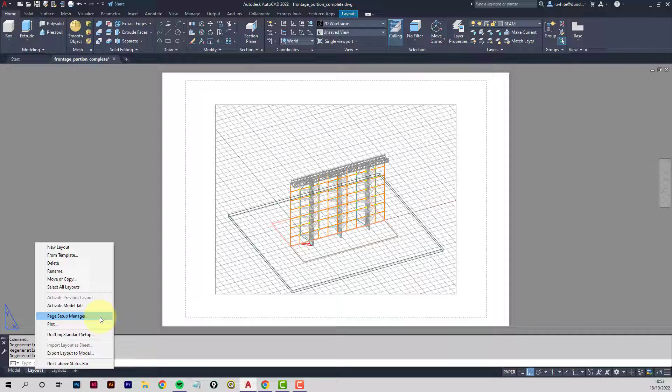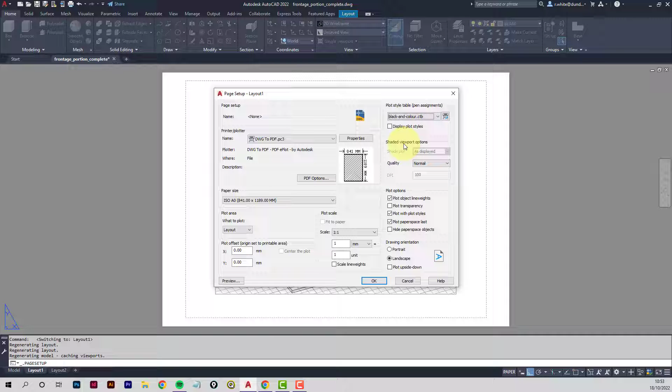So page setup manager, modify. Let's do DWG to PDF, and we'll go for an A0, so ISO A0, and we'll use our black and colour CTB, but we're going to tweak this in a moment. So we'll get it going with that and close, and let's maximise the viewport. I'll take ortho off.

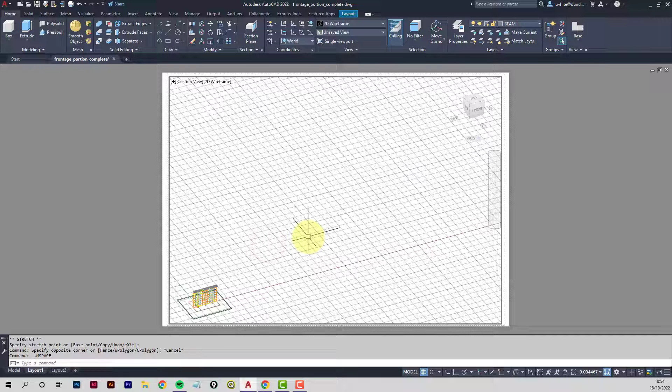Okay, so what we're going to do is set up a view. Double click inside and use the command VP, it's short for viewpoint. This way you can be a bit more specific, you're not just dragging the mouse around. You've got something you can come back to if there's a problem, so I find this a bit better.

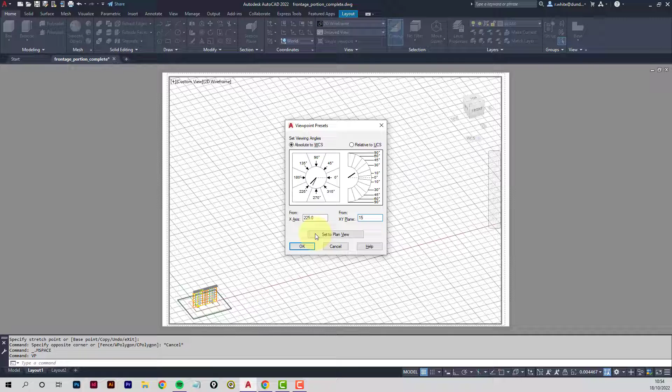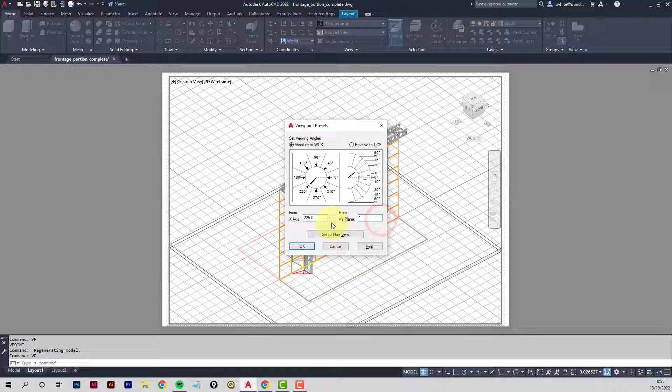So we'll go for 225 and 15. That gives us quite an even isometric appearance to the drawing, so the angles are the same in each direction, which works well. So don't rotate it now because you've wrecked that. You have to use VP and 15, we've got to keep it at that.

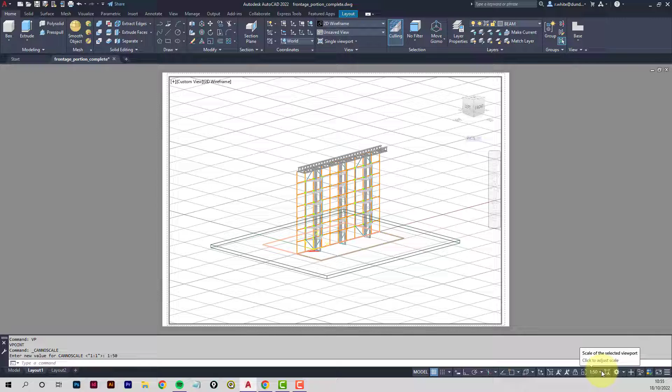Okay, and then we'll set a scale, and this is where it gets a bit guessworky. We'll try to see what scales we've got that are going to work. Maybe 1 to 50, that's going to be a bit too small. Maybe 1 to 30, possibly a bit too big. We're somewhere in between, we'll try this 1 to 40. I think that's probably going to be about right.

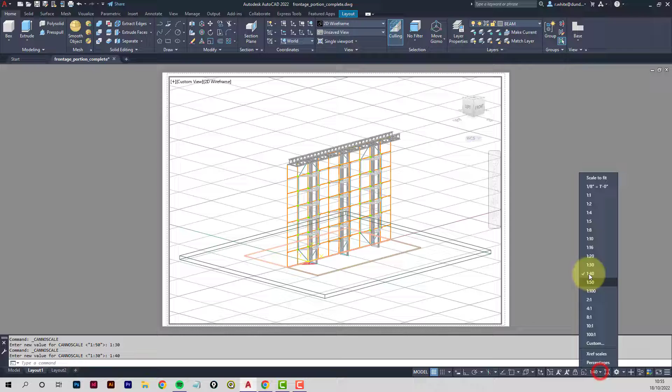Yeah, because we've got to pull this, extract the objects in this direction. Let's go 1 to 30, let's see, let's make it quite busy. So the bigger we get, the bigger we have this, the clearer things are going to be. I'm chickening out, I'll go 1 to 40. Okay, and then we'll tuck that into the top corner.

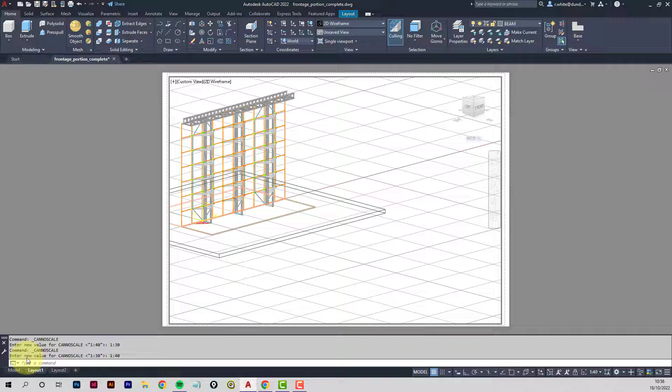Okay, so we've got room to pull the objects in this direction. Difficult to move the objects in paper space, so we'll jump back to model space to do the moving and look down on it from the top. So World UCS plan.

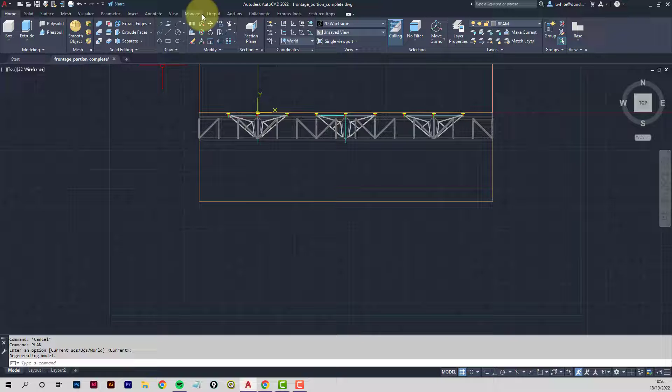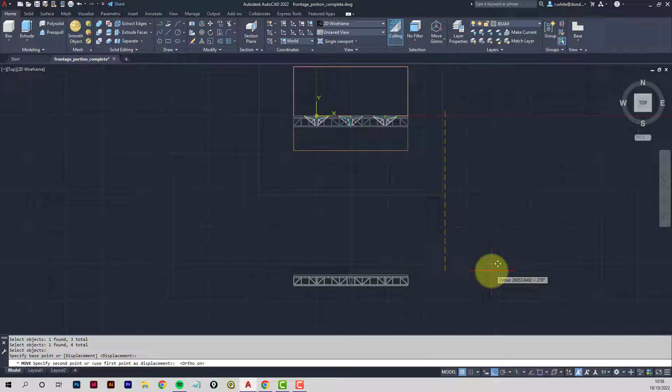Okay, and firstly we want to move the columns and the truss on the top. So I'll get the move, pick the truss, and hopefully picking up the columns here. And I'm going to use numbers, I'm going to put in distances so I know how much I've got to move things. So ortho on, and let's see what, say 30,000 looks like. So I'll move this down 30,000. Let's see if it fits in the view. Yeah, quite comfortably, that's not too bad.

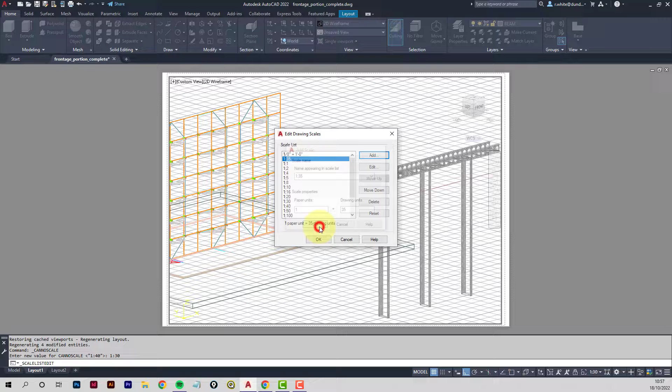So I think we could probably up the scale here. Let's go up to 1 to 30. Oh, it's just a bit nippy, isn't it? I'm going to do a custom one, 1 to 35. I want to add to this list 1 to 35. Drawing units, 1 paper unit equals 35 drawing units. Okay, and then apply that. Yeah, that's snug, I like that.

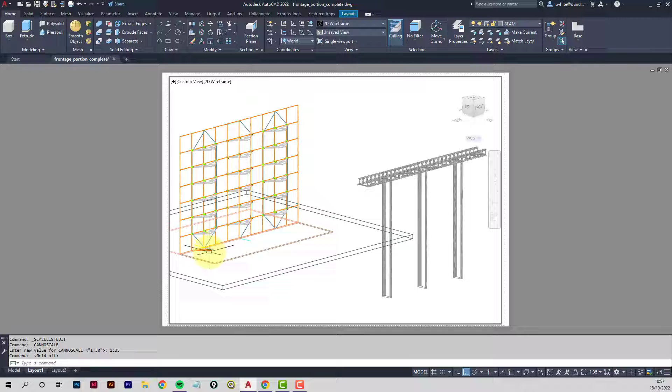Okay, we don't need to see the grid, that's causing a bit of mess. There's a few layers here that aren't really relevant either, so we've got some 2D stuff, and the bases as well, they're not going to really work in the diagram. So let's globally freeze these, so we've got floor, base, and ARM_2D, column 2D, and construction 2D. So we don't need those.

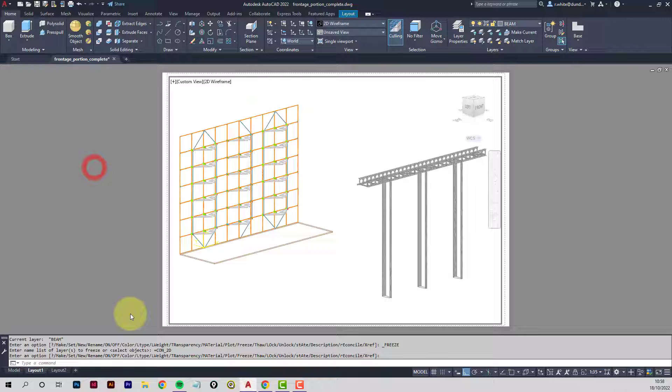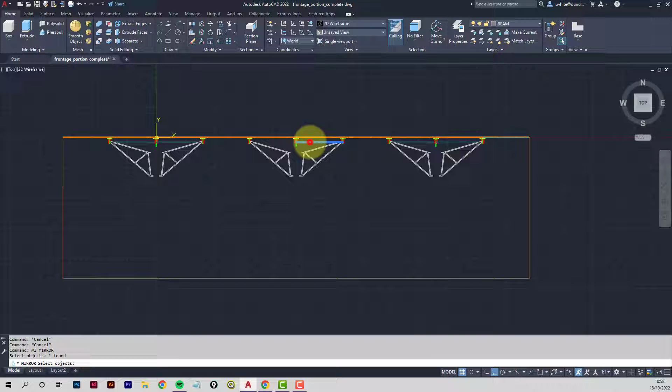Okay, now we'll move the trusses next, and the cables, we'll put those together. So I don't want too many rows of objects, or it gets a bit chaotic. We're missing a cable there by accident, actually. So if I mirror that around the insertion point of this object, there we go.

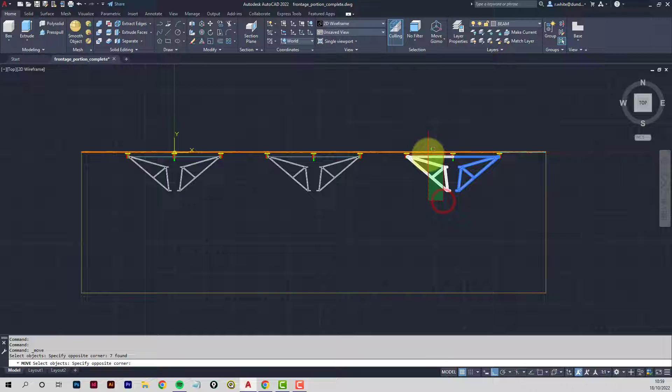Noticed that before. So we want to move these. I'm using a crossing window because there's a stack of trusses going down the way, so if I do just a single pick, I'm only picking one of them, not 7.

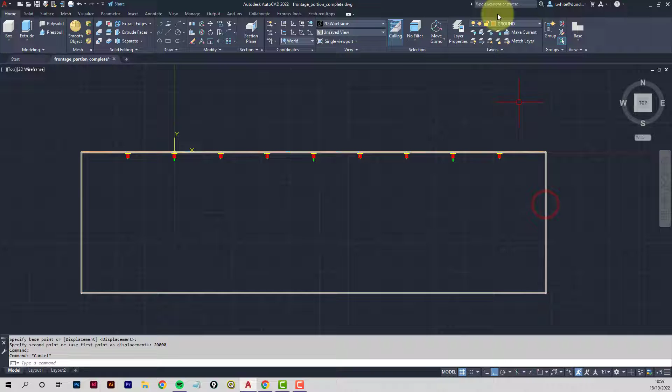So crossing windows, and then a base point anywhere, and we want to be, say, 20,000 this way. Okay, there's another layer there that could do with being switched off. Ground, let's freeze that one as well. Ground.

Okay, have a look at that in the layout. That's not too bad at all. We're not obscuring the trusses, but we know there's a bit of depth there. Having a little bit of stuff hidden is good. It kind of establishes the depth.

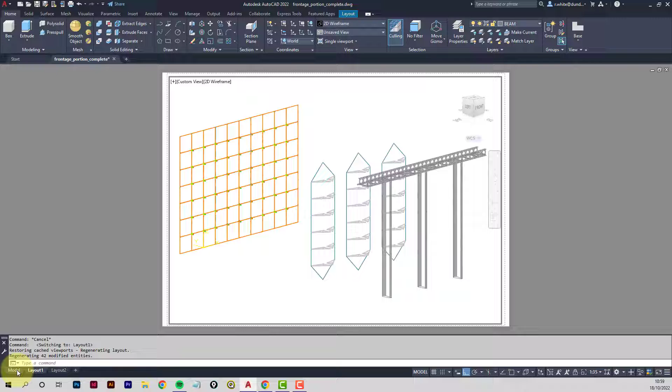Okay, now we've got the connectors to move. Having set this up before, I kind of know that if I move these 7,000, they should sit quite nicely. So I'm going to move them 7,000. When I mean sit nicely, they're not getting obscured. They're sitting in the middle of the window panes there.

They're not lying on top of the lines, which would make them difficult to see. If I demonstrate that, you don't want them to be sitting somewhere like that, so they're all sitting on the lines.

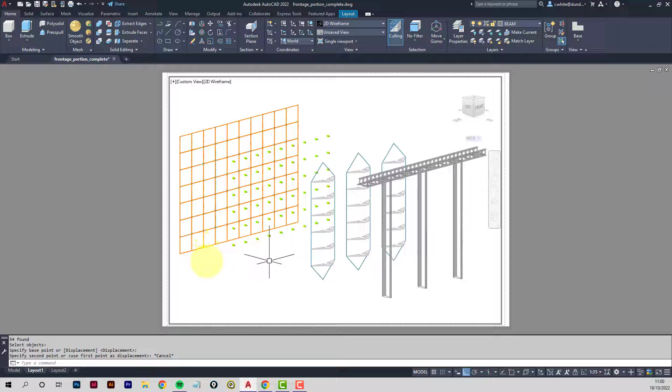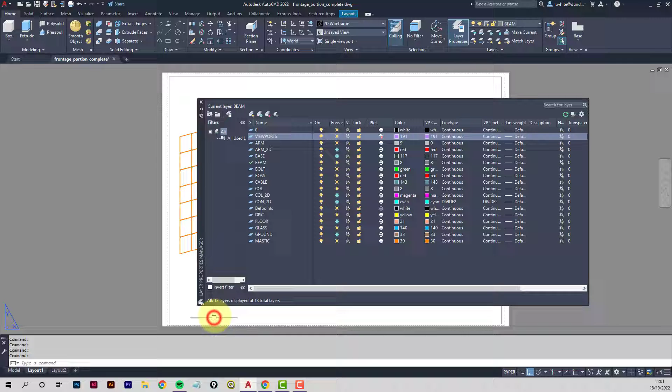Okay, so that's the kind of setup for the view. We've got to do a bit of layer control now. So I'm going to double click outside. Let's put the viewport onto its own layer so we can make sure we switch it off. So create a new viewports layer. Make it non-printing and give it a funky color so we can recognize it. And pop that onto the viewports layer.

Right, now ortho off and the O snaps are off. What I'm going to do is set this viewport to be the connectors and everything in front of that. So I'm hiding some of the glass, because I want the glass viewport to behave a bit differently to the front one.

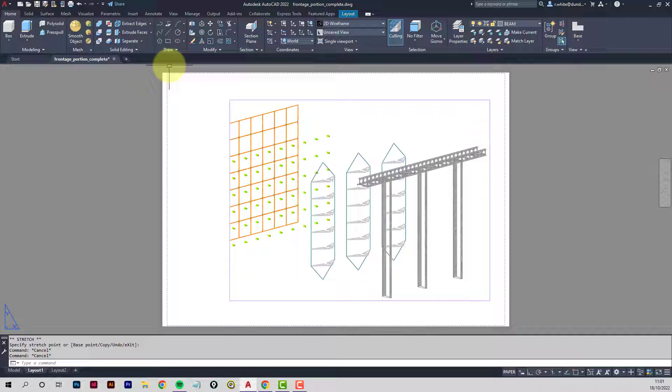Then we copy the viewport onto itself. Copy, enter. Need the O snaps now, so it's got to be in exactly the same place. So from here, pretend to go away, come back to here and pick, enter to stop. And then what I'm going to do is just fold this, resize this. So I'm only editing one of them just now, so I'll just make it a little bit smaller. Okay, and it's only got the glass in it.

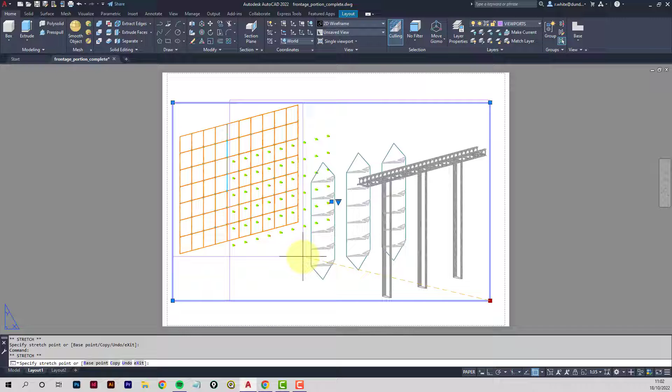Now what we do is a bit of viewport layer control. So I'll start with this one. What I'm going to do is freeze all the layers only in that viewport. So it's VP layer is the command, enter, freeze, star, so that's Shift 8 or it's above number 9 on the keypad. And then you have to choose the viewport. It says what do you want, which viewport you want to freeze them in. So we select, pick this one.

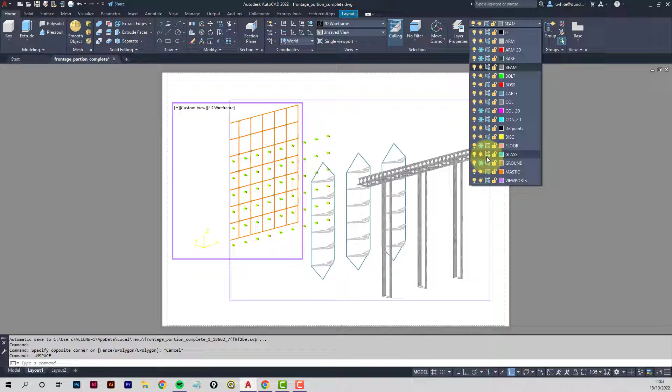Enter twice. Okay, it looks a bit strange, but then activate that viewport, drop the layers list down, and you notice they're all frozen in this column. But we'll just thaw the glass only. We'll not bring back the mastic because that obscures quite a bit of detail. So we've just got the glass coming back in that one. Now go to this viewport, and in this one only we freeze the glass and the mastic. Everything else stays there.

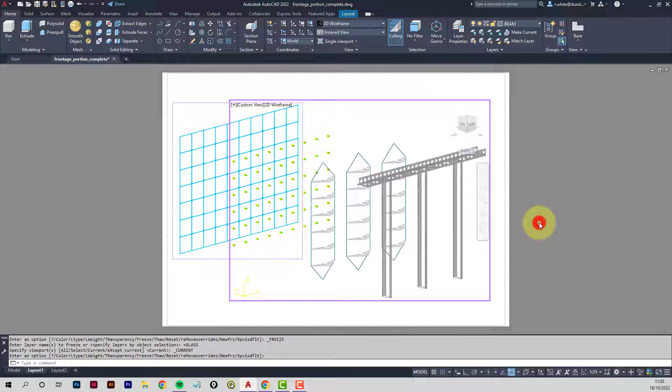If I just temporarily move this away, you'll see there's no glass there. The glass is only visible in this one. It's a wee bit tricky, takes a bit getting your head around how to, what the order and things to do it, but it's pretty good. Okay, let's do a plot preview and just have a look at what things look like just now.

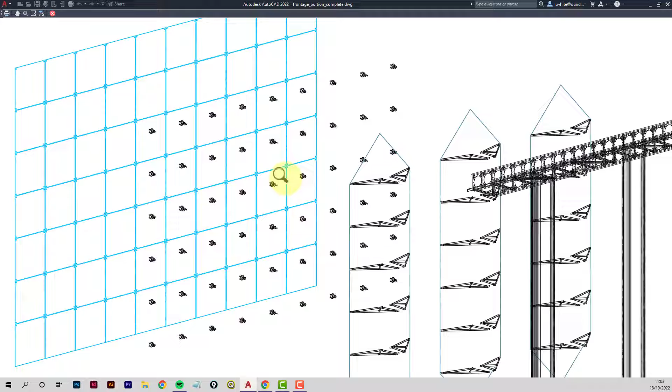Okay, so it looks, you know, technical, but it's a bit messy. We've got blue lines here for the glass. We've got a mixture of stuff that's heavy. There's no hidden lines. It's all a bit too chunky.

So let's deal with the hidden lines first. To do that, you'd use a command called MVIEW. MV, enter, shade plot, hidden. And then when it says select objects, it means select viewports. So we're just doing the hiding on this viewport only. We'll leave the glass as it is.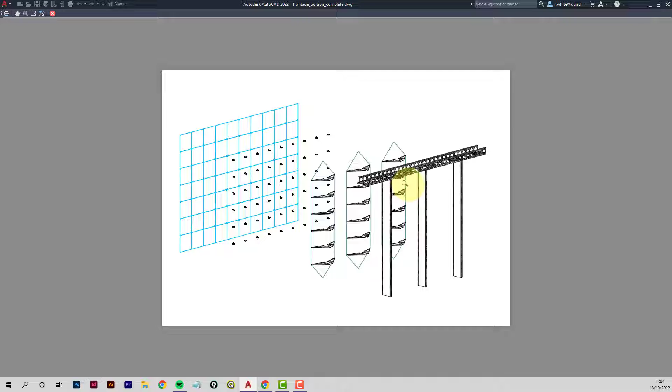Okay, so that's that done. Let's test it. Do a plot preview. So now you see where the column is hiding the trusses there. These are looking a bit more defined, but we've still got problems with colours and line weights. That should be hiding there. It's a bit. Oh no, that's right. That does go over the corner. That's right. That's doing it right.

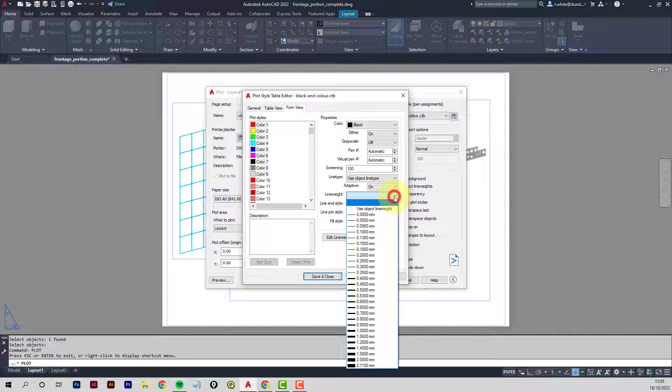Okay, exit the preview. What we can do is edit the CTB to deal with the color issue. So edit the CTB. So select all first 9, and they're all going to be printing black anyway, which is fine. But we want them to be 0.05 millimeters, so it's the thinnest pen it can use. So then save as, and I'm just going to add thin to the end of that.

Save and close. We need to remember to change it here to the thin one, and then apply that to the layout. Oops, sorry, that's to continue the plot. That's fine. So we've applied it to layout.

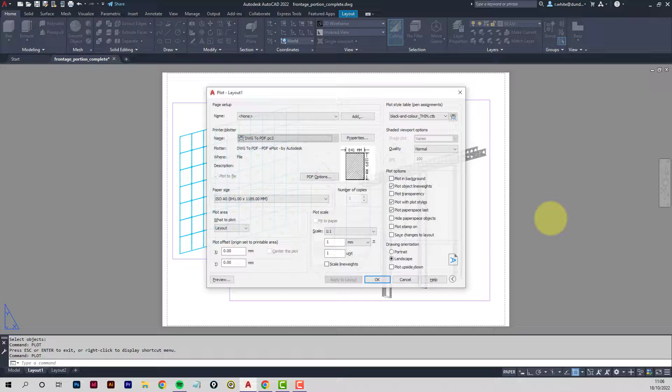We can close the dialog box. Let's just test that, let's do a preview. Okay, so the line weights are looking better and looking finer.

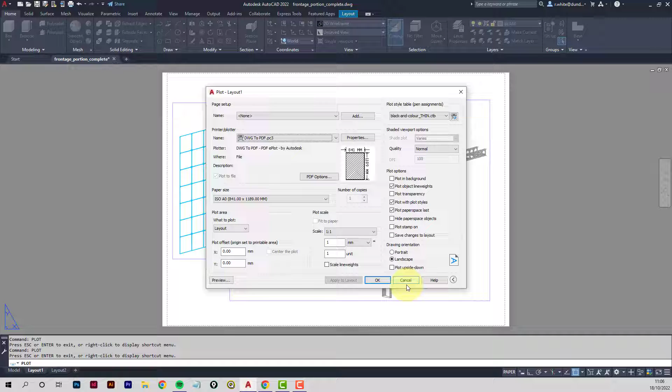Okay, we've still got a couple of colours here that are rogue. You deal with that with the layers dialog. So if we go into the layers dialog, we're looking for the ones that are colours above colour number 9. We're not printing that one anyway, so we don't need to change that, but we are printing the cable, so we'll change that.

Let's just make that cyan, and let's make the glass blue. And that should deal with that. So everything should print out black now and thin lines.

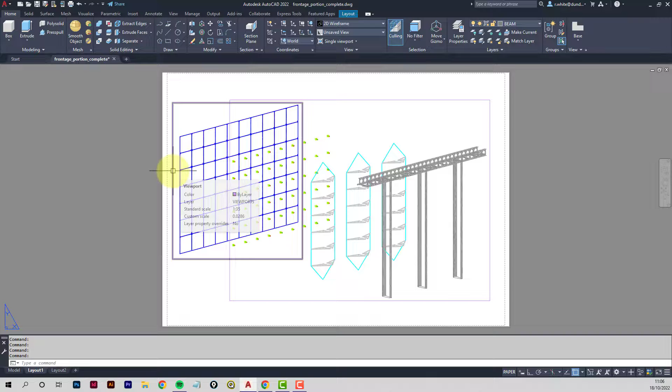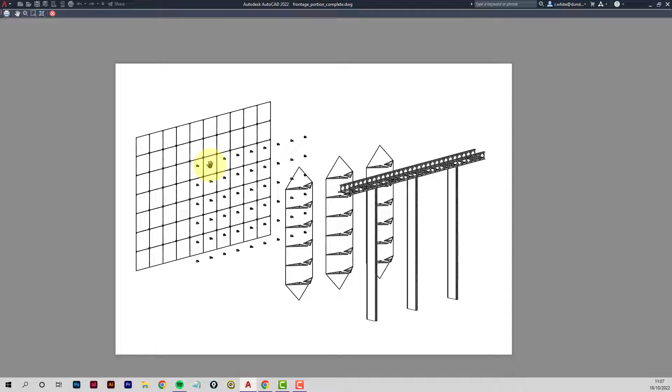Let's do a plot preview. And that's the way I wanted it to look. So it kind of looks glassy now. So everything's an even line weight now, which is what you would expect in this kind of diagram. Nothing's chopped through, so there shouldn't be any heavier lines here than anywhere else.

Okay, and after that it's an annotation job. So this is done in paper space. So let's create a new layer for annotations.

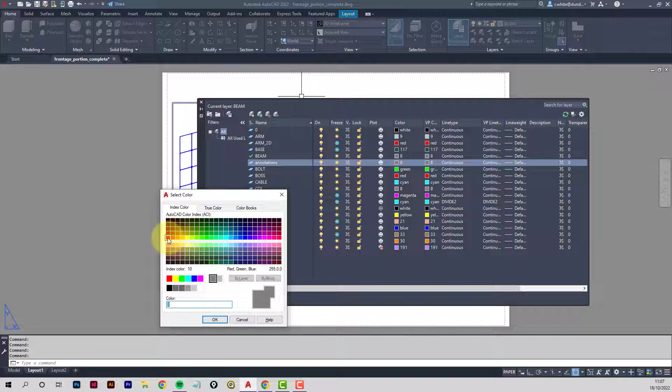I'll make this, let's just go with a bright red at the moment, so color number 10. So these will print in red. Okay, let's make that current. Actually, let's be tidy and make this in capitals as well. Let's just call it annotate.

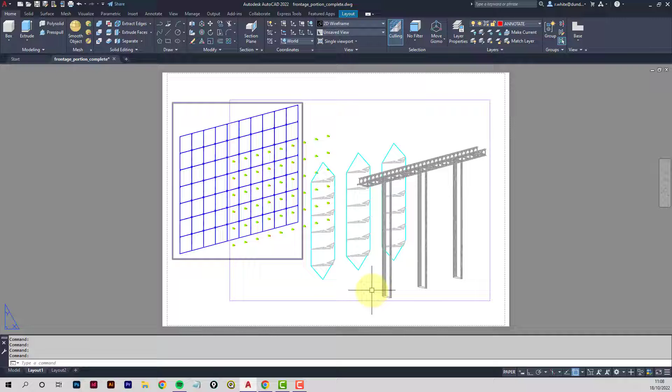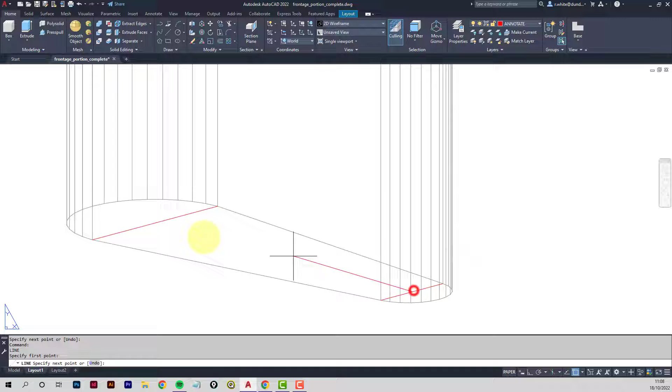Okay, annotate's current layer. So we need to set up the line to show the kind of breakdown. So what I'd do here is actually trace, while I'm in paper space, trace over the drawing. So if I draw a line from here to here, one from there to there, pick up the end, and then from midpoint to midpoint, midpoint to midpoint. Okay, I can set my coordinate system to be that line if I want to.

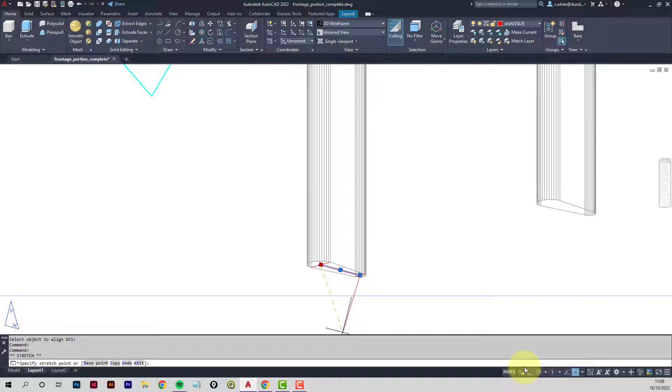So you can do UCS, enter, and then pick an object. So anytime I draw a line, it's going to be in that direction. So if I want to stretch that with ortho on, I can just use the grips. So you see how you're kind of implying these are connected. So we don't actually draw onto anything, just kind of leave it sitting like that.

But let's put this line onto the connectors. So we'll draw a line that goes from glass to connector to truss. Okay, so let's move this from end point there to the insertion point of one of the connectors. So it's handy keeping them as blocks.

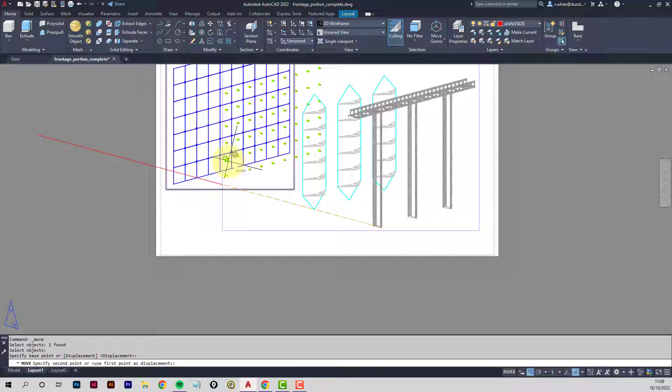So we'll go to the insertion point of, let's just overrule the others for a second, so it only finds insertion points. So let's go to this one. Okay, and then I'm going to extend that till it goes to the end of the truss.

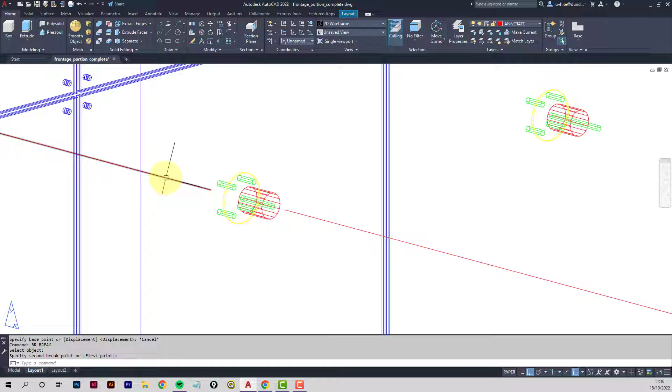Okay, now we can break that, make it look a bit more diagrammatic. We can just break the line, so it implies that it's kind of going through the object. And similarly here, if we break it just about here, it shows the connection there. So BR, pick, and then delete that. So you get the idea, it's kind of coming through.

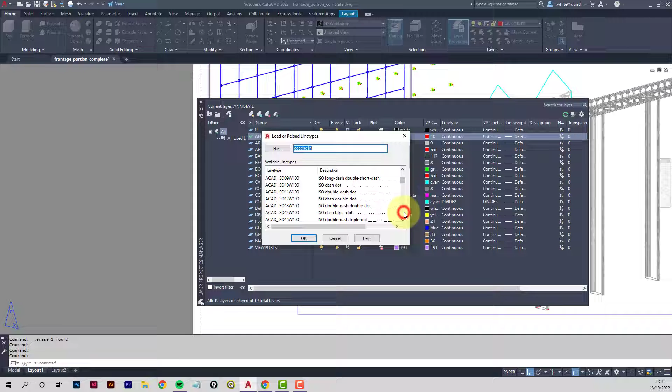It'd be good if these were dashed lines, so let's make the layer a dashed line type. Divide, no, I think we need another one in there. Let's go for dashed, so what's that one? Divide 2, let's use dashed 2. Okay, we need to use that, so let's click it and OK.

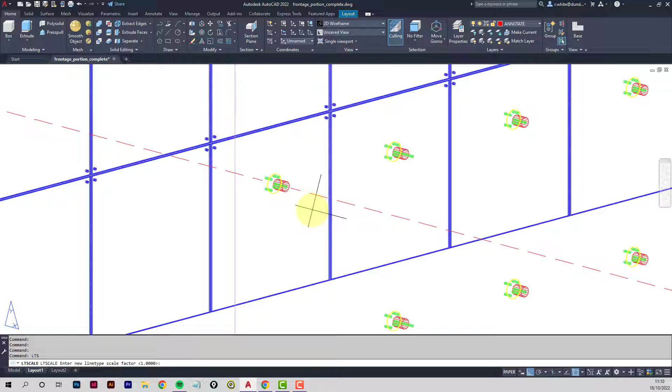And what have we got? That looks not bad scale actually as it is. So if we wanted larger dashes, obviously change your line type scale. At the moment it's 1, if you set 1.5, you get bigger dashes.

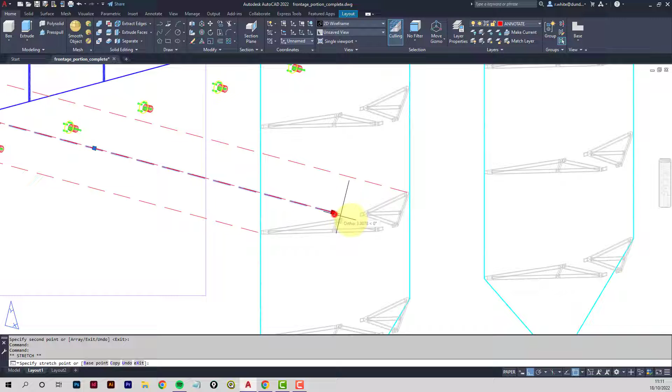Okay, and then you could copy that. So copy those two line segments from insertion point to insertion point to insertion point. Okay, and this middle one will show that coming through, because that goes through to the back of the column. So we'll just imply that that's coming through there.

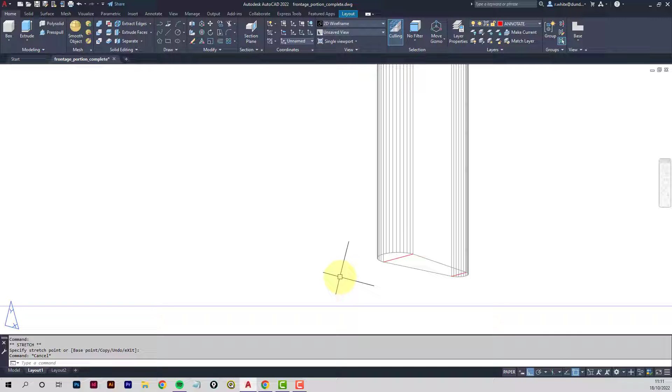Okay, so you'd repeat that wherever you've got any detail that needs drawn. You've got the line in the other direction, so if you're needing lines to go in two directions, change the UCS to this instead.

So let's move the truss upwards. If we go into the viewport, I want to be in the world coordinate system, which I am. That's good. And then I can move the truss.

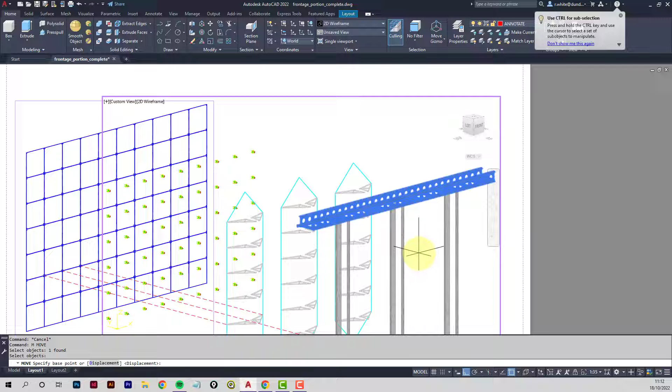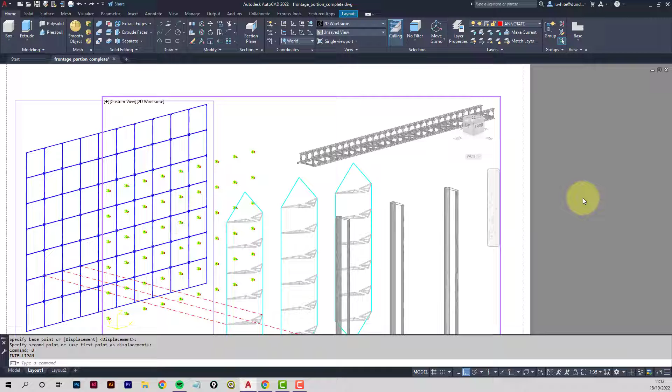Okay, I don't want to move it too far. Let's just take it up just now. Okay, oops. Object snaps, should switch those off. Move this. Okay, and what I'm going to do, don't pan, don't pan, it wrecks the whole diagram. Okay, double click outside for safety.

What I'm going to do is imply that there's a connection to the glass, that the glass connects onto the edge of this object here. So I'll set the UCS.

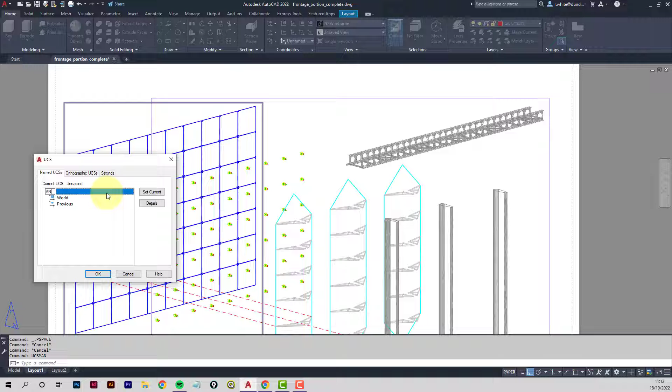We could save this UCS if we want to use it again. We could use it again. So UCS manager, right click unnamed and rename, and we'll call it annotate 1. Okay, so we can come back to that whenever we want to.

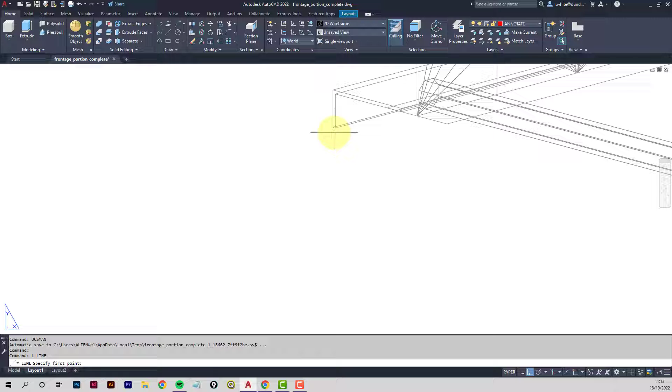Okay, so I'll go to the world coordinate system just now and draw a line up from here but down from here. Okay, so using my annotate dash lines, I'm just going to go down a bit. I'll go down to about here.

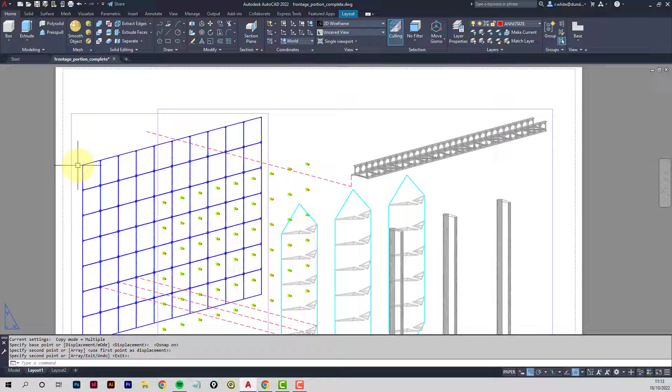Okay, and then copy one of these. I need endpoint available now to there. That's fine, it's going to be fine. It's not going to go out the top of the drawing, which was my worry. Okay, so I'll draw a line up from here and then just join those two together. So fillet those two, and that's kind of implying that connection.

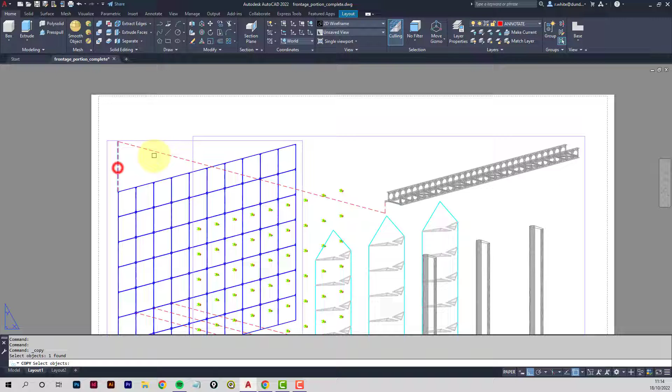Actually, let's see if that's going to fit. If we'll copy that to the other end of there, because it will look tidy. Copy these. Okay, so we'll use the corner of the piece of steel, and it's going to go to here. So that was the concern, that you end up a little bit too big for the page.

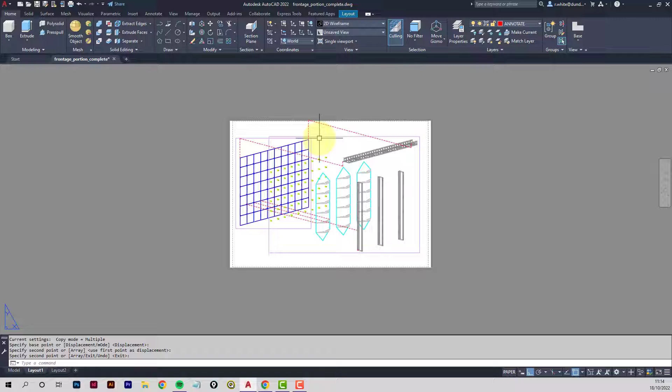So we've got enough slack, we've got a fair bit of space at the bottom, we can just move that down, move everything to make sure it fits on the page. We can move it sideways a bit.

So that looks good. So you're kind of showing how, you know, this is supported by the back of that metal plate.

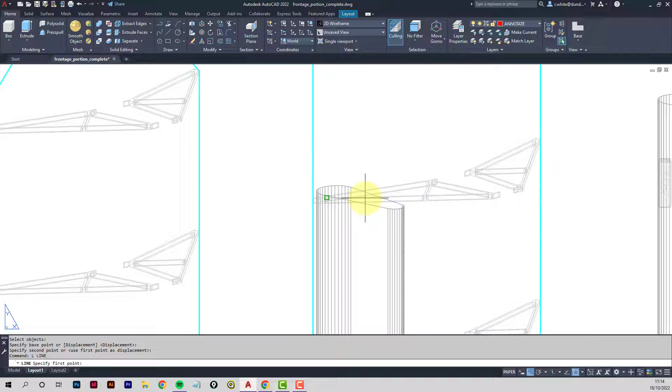Okay, what about a line from the middle of the column? Okay, take that up. Okay, so it comes up to here, but it's going to be hidden, but we'll just pop it there for now. Okay, and copy that from column to column.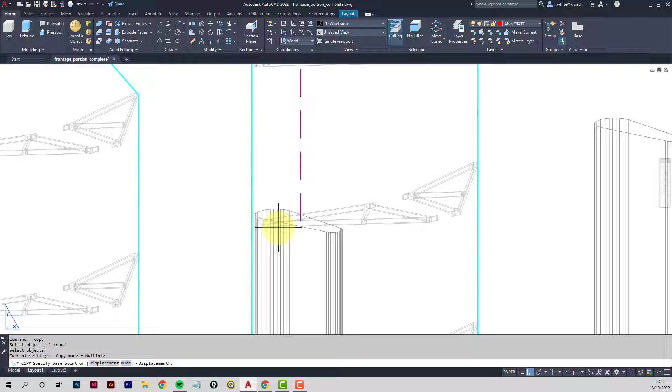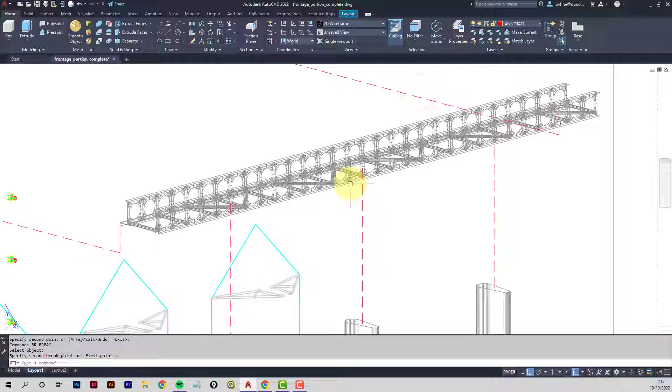Okay, so it's hidden on all of these, which is a shame. Okay, so what we're going to do is break that, because I don't want the line to be over the top. So I'm just going to break the end off.

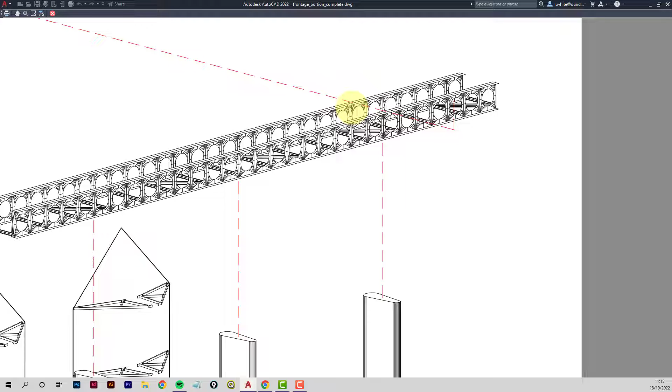Okay, we could do a bit of tidying up here, because this will imply that red line's on top of the truss. If I just show you what I mean. So I'll do a preview here. You see the red lines going over the top, so that, you know, it's a bit of an Escher kind of conundrum there. It shouldn't be visible.

So what we'll do is just manually break bits off. Okay, so we wouldn't see this bit. We'd see a little bit there, so I'm going to keep that. Okay, you see what I'm doing? Just making it, hiding it behind the object.

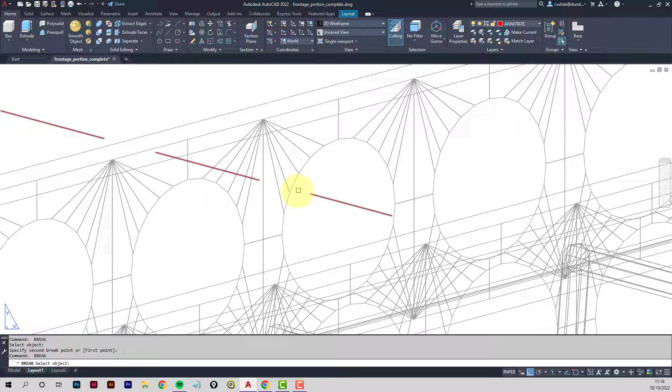So you can't use the hidden line. The hidden line won't do this because the line's in paper space. So we'll break it through to here and then break it to there. So that's going to look a bit more as if it's a 3D connection now.

So we'll preview that. There we go. So the red is kind of showing behind. It appears that it's kind of drawn behind the object, but it's not in reality. Okay, and you just kind of keep going with that.

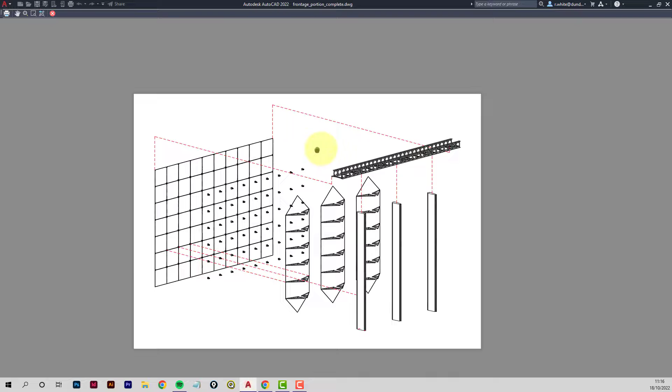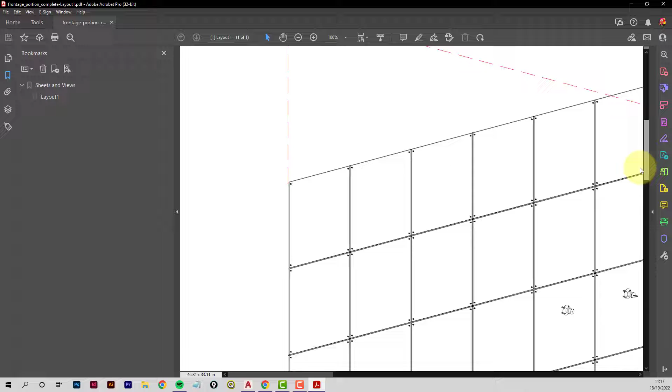So let's plot this now, just see what the printout looks like. Okay, just pop it on the desktop so I can get to it. Maximize that. Let's just zoom in. So it's really nice and fine. So the print preview isn't as fine as looking at the finished PDF. So it's looking nice and crisp.

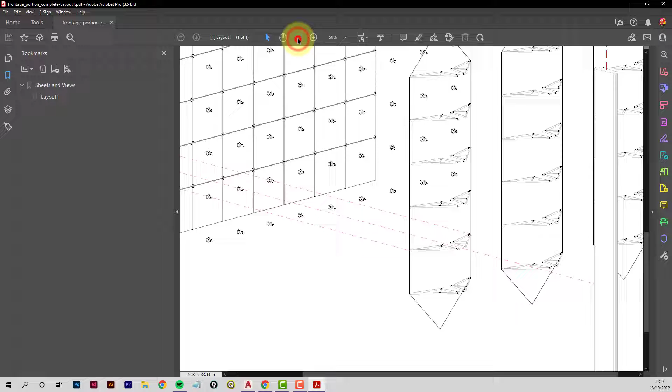And that's kind of what you want, you know, a nice sharp drawing, which you've got plenty of option to have it smaller, but it's starting off nice and big and clear. Okay, I hope that's been useful.